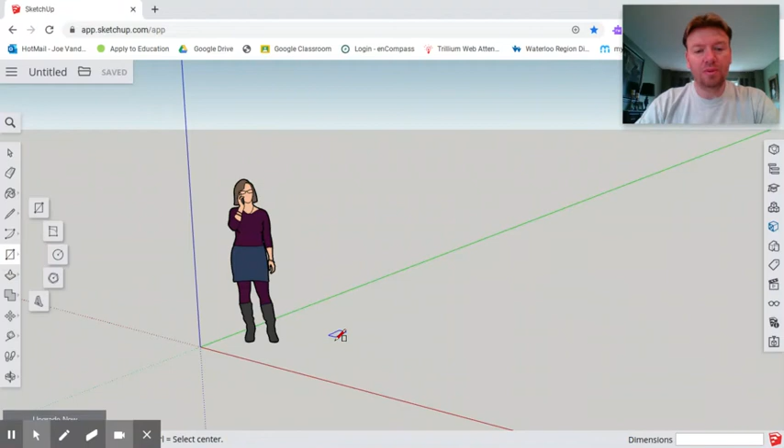We're going to start by selecting our tool here on the left, the rectangle tool. And we're going to take it to the surface. We're going to click once with our mouse, and we're going to let go. We're going to drag to the size we want. If we look at the dimensions on the bottom right, it tells us how big that rectangle is. We're going to type in the size.

So a wall stud is 1.5 by 3.5. And you can type 1.5 or you can type 1.5 by 3.5. There, we've typed it in. You can see the measurement down there. We now hit enter. Okay, and it's really, really small.

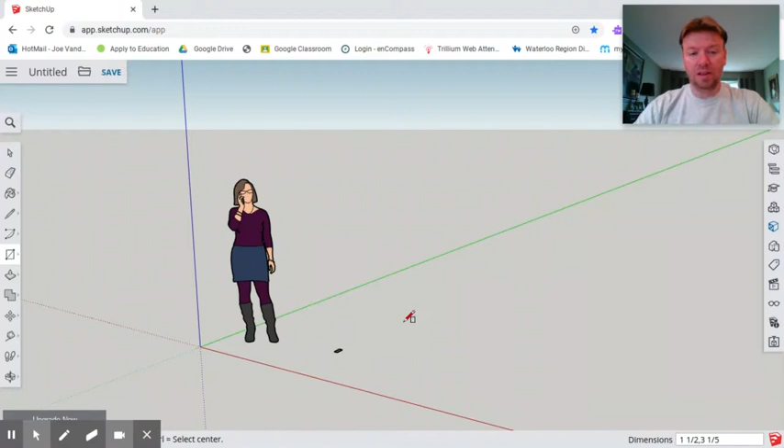So we can go to our zoom tools here. We can zoom in, or if you have a mouse, you can use the roller on your mouse to zoom in to where it needs to be. There it is. We're now going to use what's called our push-pull tool. So if we look on the left of our tools commands, there it is, push-pull.

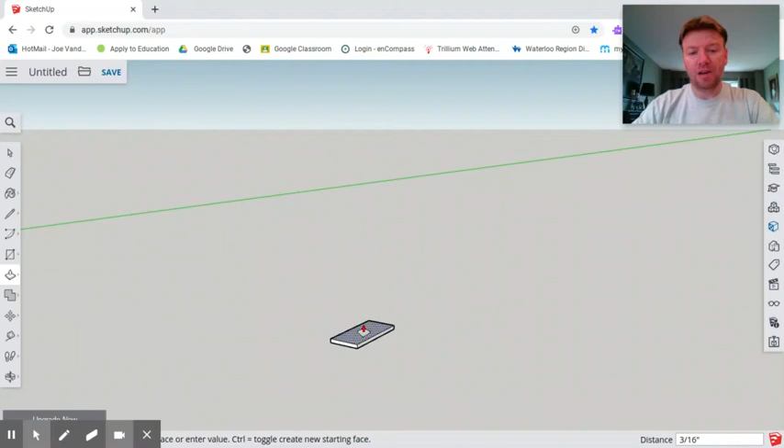We select the surface we want to pull, and we can lift it up and down. And we're going to lift it up. We're going to pull it to 92 5/8. And that is the length of a wall stud inside most residential homes. This is known as a pre-cut stud.

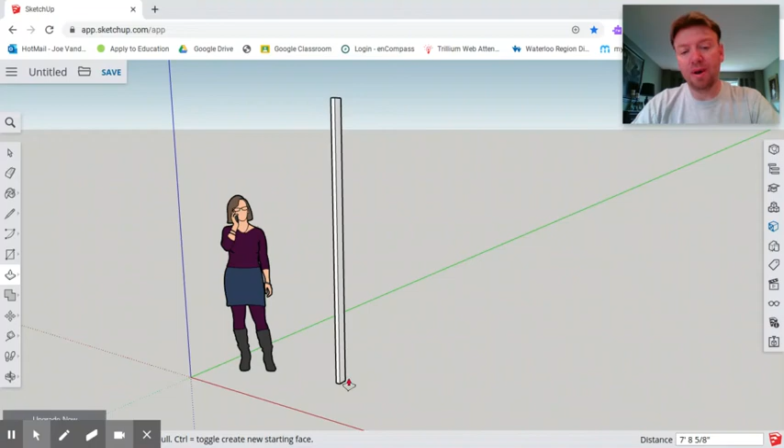And the reason they make it 92 5/8 is because when we add a bottom plate or a 2x4 at the bottom and a top plate, a 2x4 at the top, and a double top plate, the total height of our wall then, including the bottom plates and top plates, is 8 foot 1 inch. And that allows us to put 1/2 inch drywall on the ceiling, plus our 8 feet worth of drywall on the walls, and it leaves a small gap at the bottom. Okay? And that's standard for all residential framing here in Ontario.

So now we've got our wall stud. We're going to actually go to our paint bucket here. So it looks like a little pail with something coming out, and it's called paint. So we click on paint, and it brings up a bunch of materials. Now, sometimes we may have to go to this browse button to see what other materials are available. So click on that browse button.

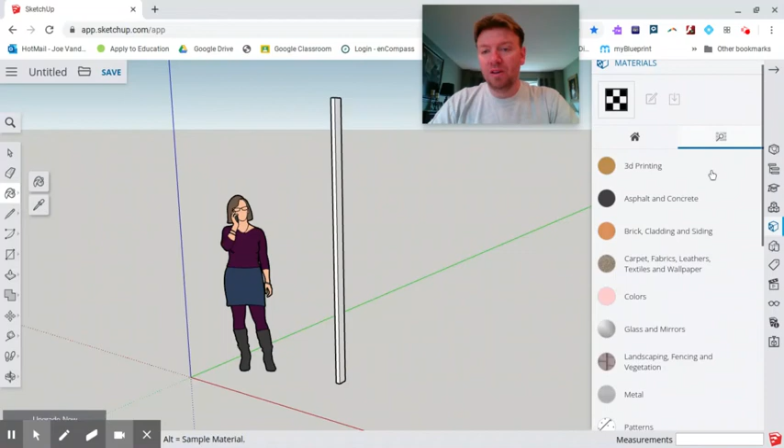I'm going to cruise down to where it says wood. I'm going to select wood, and I'm going to pour that paint. I'm going to minimize that so it clears up my screen. I'm going to pour the paint into the surfaces of our 2x4. I'm going to rotate this around using our orbit tool because I need to paint it on all sides.

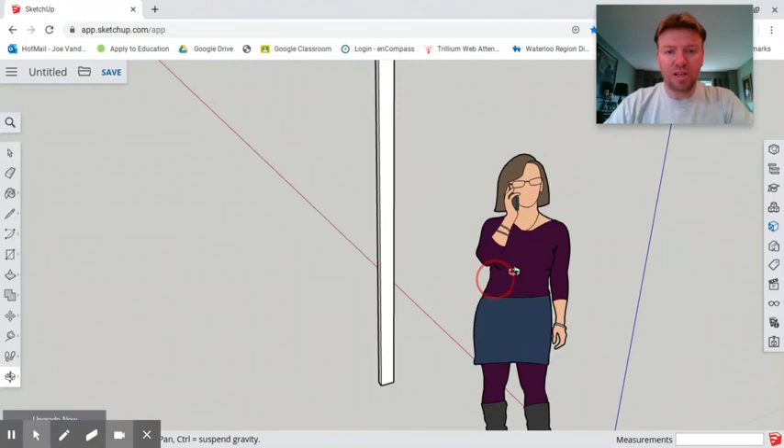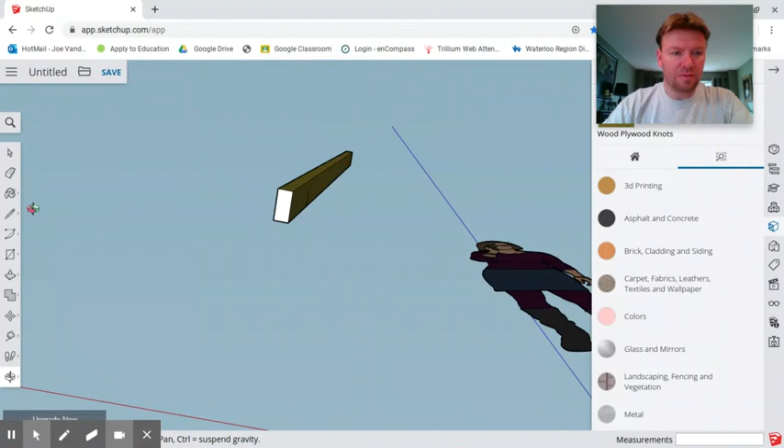I'm going to zoom to the top, or orbit to the top, I should say. There's the top. I'm going to paint onto the top of our stud, and I'm going to orbit to the bottom. I'm going to paint the bottom. And then I'm going to try and get us back to where we were looking at before. Okay, so there we have our wall stud, and in comparison to our person, it's about the same size.

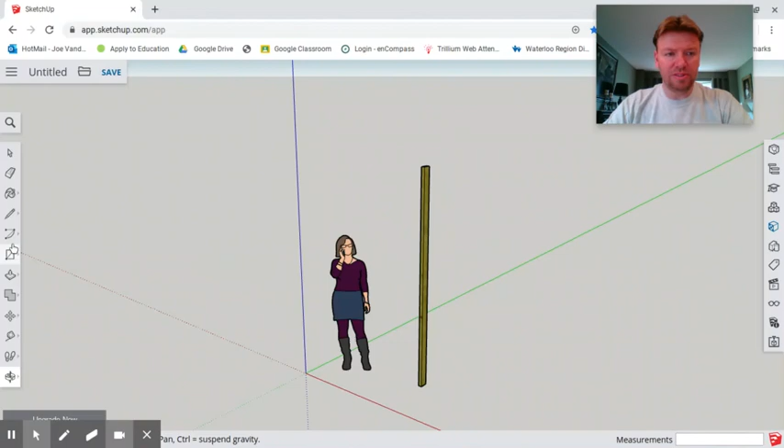What we're going to do now is go to our select tool, and we're going to select all the parts that we have drawn. Okay, there I've highlighted all the parts, and now we're going to make it a component or group all those lines into one. So we press the letter G, and we're going to type in the word wall stud. And this is going to make all those parts into one component. Okay, it takes a bit.

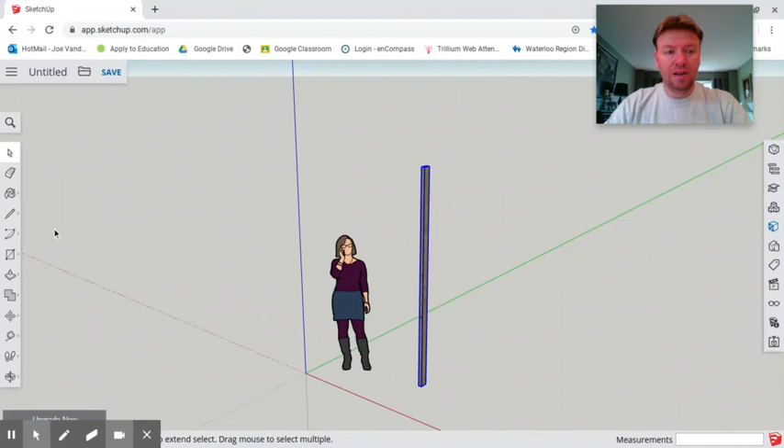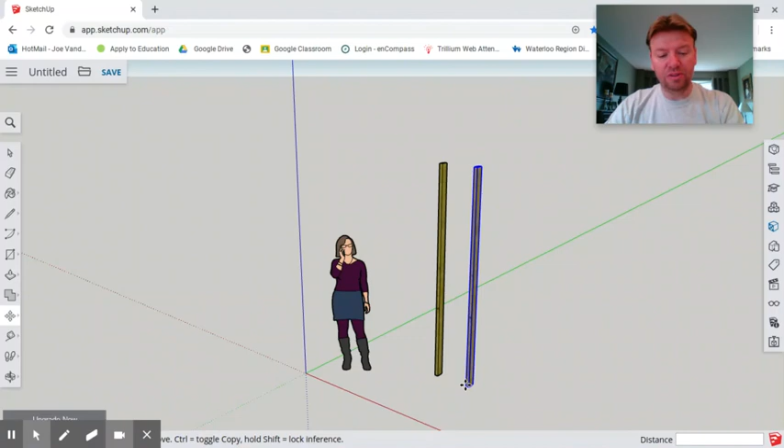And now when I go to, say, move, I can click on a bottom point and I can move that entire wall stud. Or if I want to, I can do Control C, which copies the part. And then I press Control V and it places it again. And there I have now 2 wall studs. And I can do Control C, Control V again. And I can continue placing wall studs, okay, by using Control V.

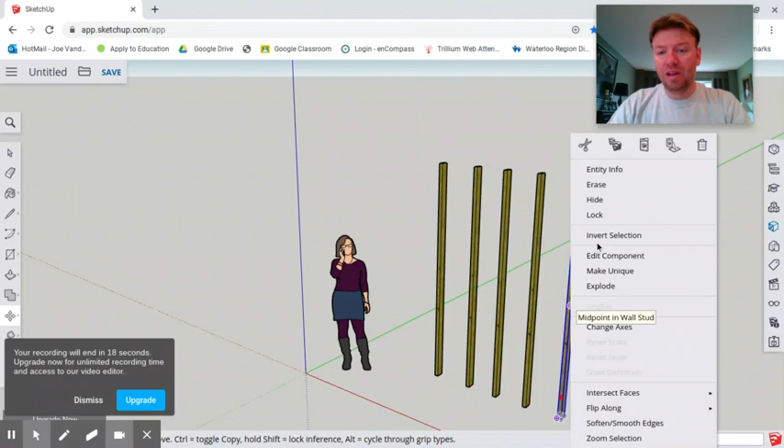Okay. Now I'm just placing them down and there's no real order and spacing. We'll look at that as another option in the future as well. If I wanted to edit a component, I can then click on a component and it says Edit Component. And if I want to change something on just that individual component, I have that option.

Okay, so that's how we draw our wall stud. I know it was pretty quick. Next little lesson we'll look at is maybe how to draw more parts of it.